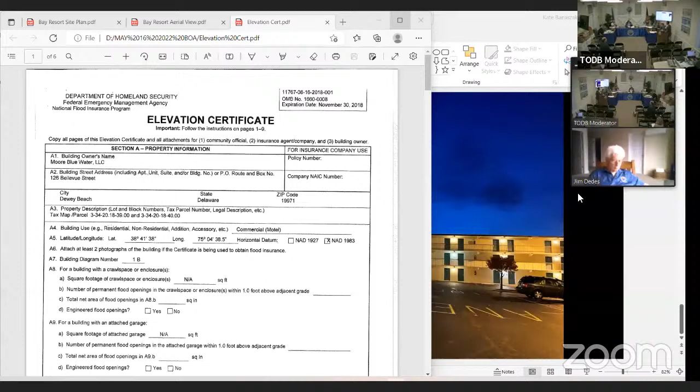Can we go then to the renderings? I'd like to show what we're trying to create with this project and what these variances we've requested will facilitate. Now let's go to it.

In the application, there's a bunch of renderings, the color renderings. Not that one. I think you showed me a PowerPoint that you had, or maybe not. It's the... here, there you go. So if you go to the meeting, it would be, if you go to, yep. So if you scroll down through that, keep going, and here they are.

So this is what we're trying to create at the Bay Resort. Some things you see in the front of the property here, there are some angled roof lines. Those roof lines do not exceed the height limitation, so we're not asking for variances in that respect, other than right in the main entrance area, we're proposing to change out the stairway to turn into an elevator to help with ADA and other guest experiences.

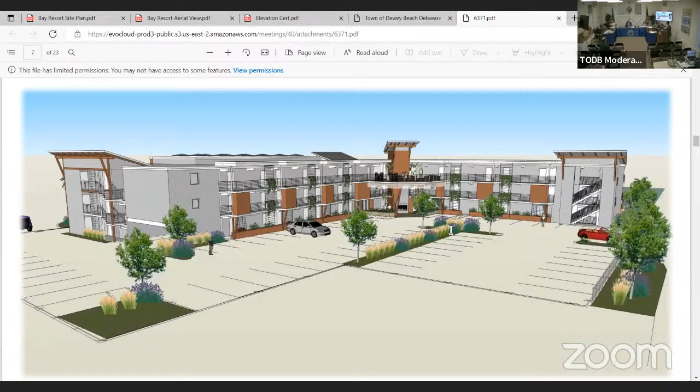And that angled roof or bulkhead above the elevator, there's a special exception allowance within the code, and we'll be asking for that tonight to be able to go 42 inches above the roof line.

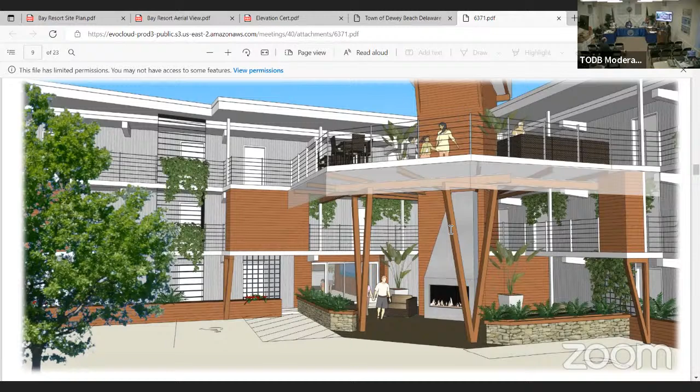Thank you. Here's just another shot of the main entrance. This one I thought was interesting to show you kind of the embellishments we're doing at the main entrance to the building itself. That top balcony doesn't exist right now. We don't need a variance or any special exceptions to create that, but I wanted to show you sort of what we're trying to create.

Next one. This is just inside the lobby. Next one, that's just a closer one. So here is that outdoor pool that would become an indoor pool if the variance for the enclosure is granted. Next one will show it, I think, a little bit better.

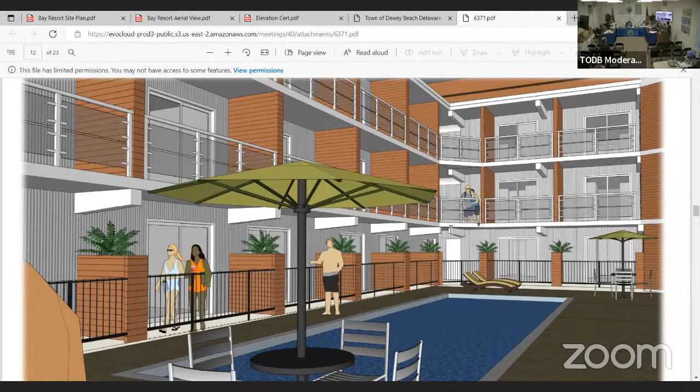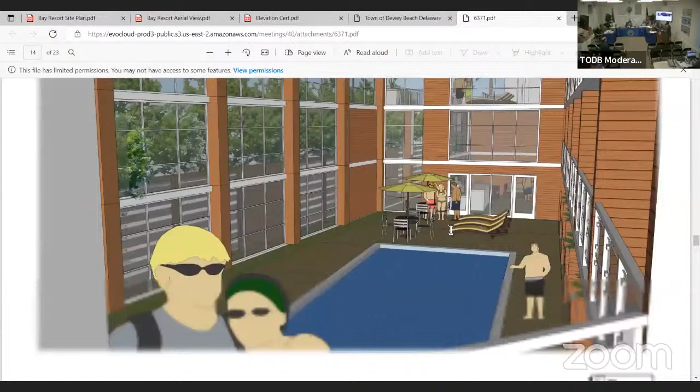One thing to look at on this photo is if you look beyond the windows at the rear of this view, there's some outdoor decking that is also part of this application. A very small portion of that decking is in this rear yard setback, and I'll show that to you a little bit later. Next one, there's another shot of the indoor pool, and if you look in the back, you can see that decking a little bit better now.

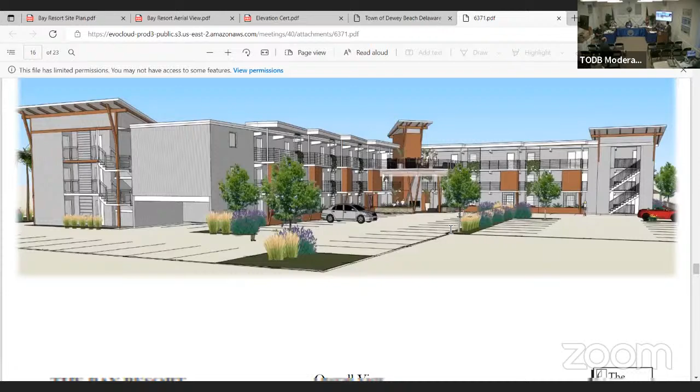Next, this is just sort of an aerial of that deck landing on the front of the property. Next, just an overall again of the front. Next one, here's the rear of the property, or actually it's a side yard technically, but it's the portion of the property that faces the bay.

The swimming pool there is a proposed new outdoor swimming pool that is subject to our application this evening, and I'll talk about why we may or may not need a variance for that swimming pool. Okay, can you go back up there? This one showed as well. So you can see the gazebo on the left-hand side - that's the relocated location of the gazebo.

Next one, this is just an aerial kind of showing everything. You can see maybe a little bit better view there of the pool enclosure on the right-hand side of the screen and the decking. Then you can see I talked about the row of cabanas at that first floor facing the bay. You can see the placement of the gazebo. You can see the placement of the swimming pool. Next.

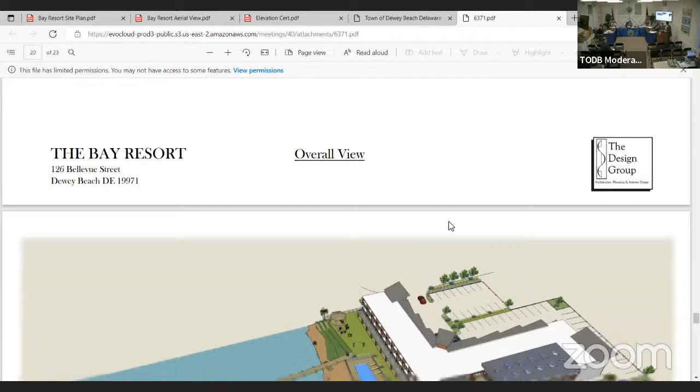Just a little bit closer shot. Next one. And that kind of shows the whole property as well. If you don't mind scrolling back, Kate, I'm going to leave one of them up. Let's just leave it on that one for now.

So that's kind of an overview of the property and what we're trying to create. I will say, anybody, please interrupt if you have questions as we're going. I'm going to go through each of the variances that we're requesting, one by one. But if you have questions, do not hesitate to stop me. I want to make sure what's important to you is more important to me than what I want to tell you. So any questions, let me know.

We'll go to public comment after the presentation, before the deliberation takes place. Yes, we're going to hear from the public.

So there is, of course, a legal standard that the Board of Adjustment will be applying as you review these variances. I will not bore you with it, I'll give you a condensed version because it was all in the written materials, I'm sure you've read all that. So the standard to be applied for these sorts of variances, these area variances, is the exceptional practical difficulty standard.

That standard was announced and discussed in the Board of Adjustment of New Castle versus Kwik-Check Realty case, the Delaware Supreme Court case. And the Supreme Court explained the exceptional practical difficulty test this way: such exceptional practical difficulty is present where the requested dimensional change is minimal and the harm to the applicant, if the variance is denied, will be greater than the probable effect on the neighboring properties if the variance is granted. So it's a little bit of a balancing test. What is the harm to the applicant if the variance is not granted versus the harm to the surrounding neighbors if the variance is granted?

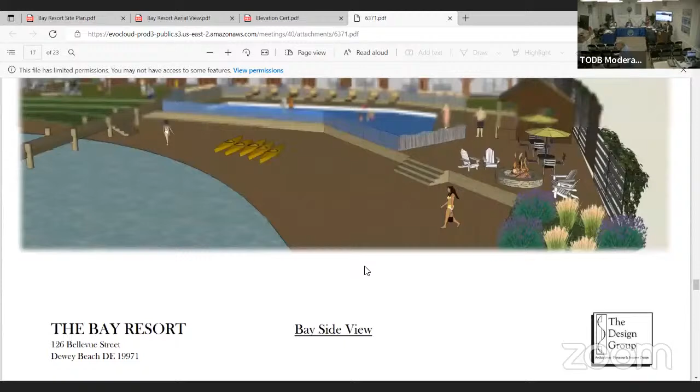How far is that? Each one is the width of the room, about 12 feet by about 5 feet deep. So each of these so-called cabanas extends out 5 feet, taking the porch from a 5-foot by 11-foot porch to a 10-foot by 11-foot porch, for just those ground floor units.

So the 12th unit, the one furthest on the left—yes, the encroachment into the setback is going to be about 6 feet, and it's going to be 5 feet wide, right. It's not extending any farther into the setback than the edge of the existing building.

And is it a solid wall on that end? No, all of those are just 4 posts with a trellis—more or less like a pergola, I guess you might call it. So it's not a solid wall extending off the existing building into the front yard setback, it's just open. There's a little bit of lattice screen rendered in the renderings here, but in this case it probably would be open—the lattice screen is intended to provide privacy between porches, so it wouldn't need to be there on that end.

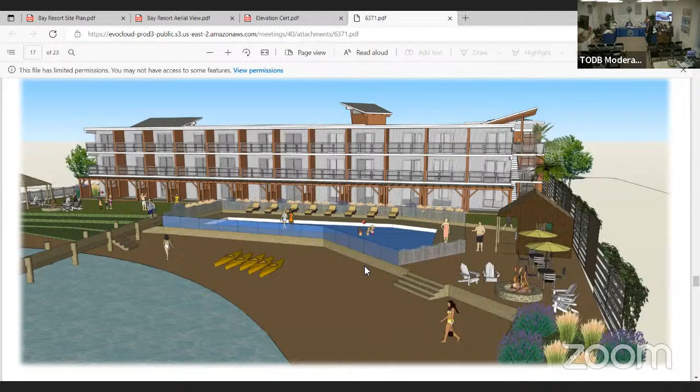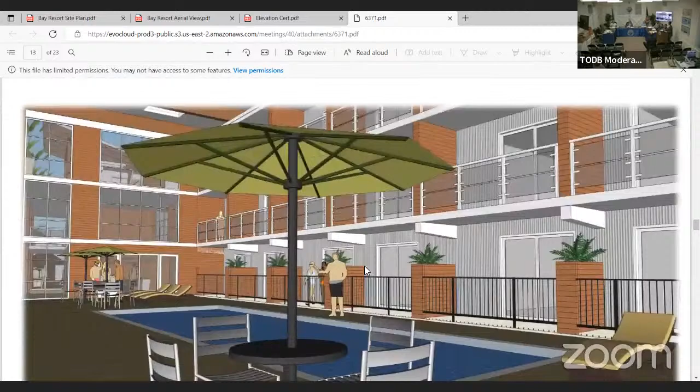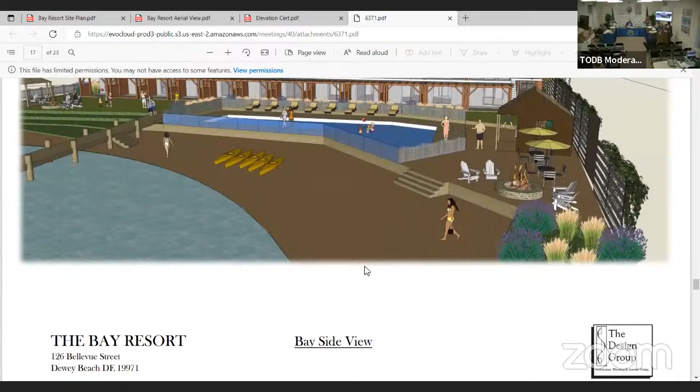Got it. So this is the first floor—you rent the first floor and they have the cabana. Correct, that's right. Do we have a better picture of that? So there's like a gray area, which is the ceiling or the roof of the cabana.

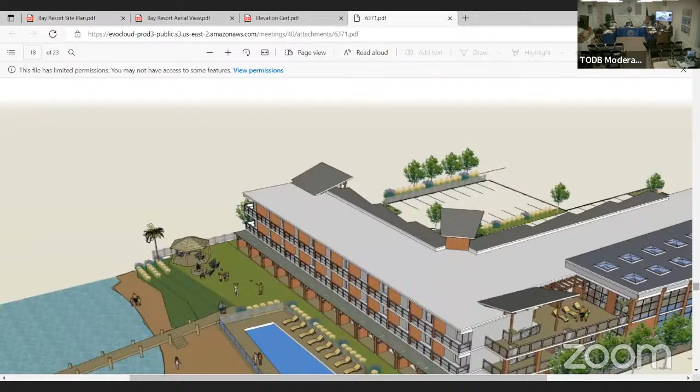Any other questions on that single cabana? David, any questions? Just looking at it. So basically what you're saying is there are 12 rooms along that row. Correct, but the variance only applies to the 12th room, because everything else is within the setback already.

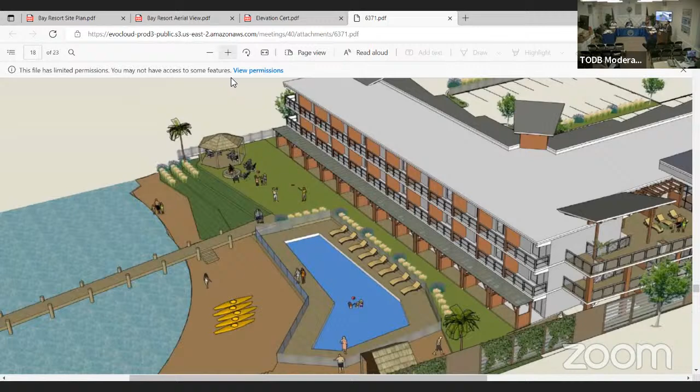Okay, so I'd like to move on now to a variance we've requested for relief from the freeboard requirement. This one gets a little technical, so I'm sure we'll have some discussion on it. In addition to zoning code variances, this board is authorized to grant variances from the town's flood damage reduction code. The existing hotel is in an AE flood zone.

FEMA has said the base flood elevation in an AE flood zone is 6 feet, so FEMA says elevate your structures 6 feet if you're in an AE flood zone. The town has added an additional 12 inches of what's called freeboard, so elevate to 7 feet.

Our existing elevation is at 6.4 feet, and I've submitted the flood elevation certificate. If you'd like to see it, we can look at it here, but it's at 6.4 feet. That was a 2018 certification. So we are about 4.5 inches above the FEMA required base flood elevation.

We are about 7.5 inches below the town's freeboard requirement. So if that makes sense, we're above what FEMA says you have to be at. The town has said let's do a little bit better, get 12 additional inches up. So we're in between those two — above FEMA by 4.5 inches, below freeboard by 7.5 inches.

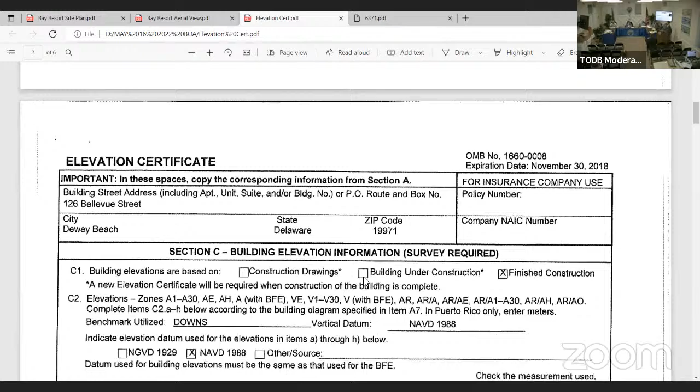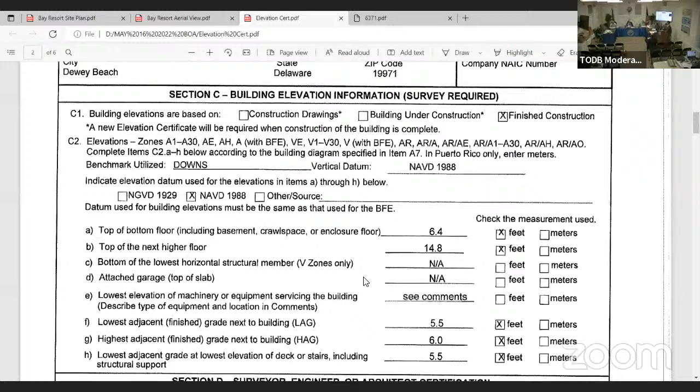So what we're asking for is relief from the 7.5 inches of freeboard. I guess you could say we have about 4.5 inches of freeboard, and we would need 7.5 more.

Why do you need that? Well, so, I mean...

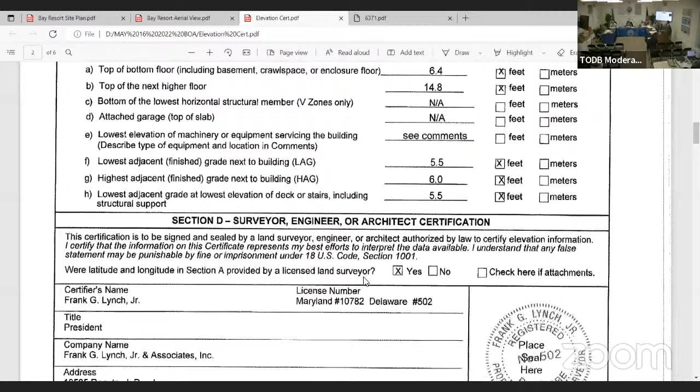You're not constructing, you're not demolishing the structure. Where do you only need it in portions of the development, or do you need it— so what kicks in is there's a requirement within the code that if additions and renovations are valued at greater than 50% of the value of the existing structure, then you have to come into compliance with all of the town's flood damage reduction code.

So if these variances were instead granted, we wouldn't. We're not sure, to be honest with you, whether we're going to exceed that 50% threshold or not. I think we'll be at least in that zone, but we're hoping to avoid it by explaining why requiring us to have that additional freeboard doesn't really make a lot of sense in this instance.

And the reason it doesn't, in my view, is first, nothing is changing about the elevation of the building. So what's been there for the past 40 years would remain. And again, I don't think leaving it the way it is works a detriment to the neighbors who have lived with it the way it is for the past 40 years.

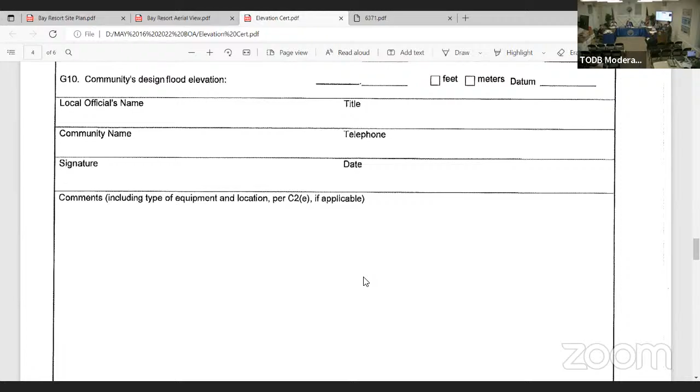So I don't think there's an argument that if we don't raise it, or if we don't do something else to comply with the flood damage reduction code, that it will somehow work a detriment to the neighbors.

Secondly, I think we'd be having a much different discussion if this structure was below the FEMA requirement. When you're below the FEMA requirement, then I think there's a real conversation to be had about: you sit in this AE zone, should we move forward and get you above it?

FEMA has said 6 is good enough. The town has said we'd like a little bit more. And that's why I'm saying it's a different conversation if you're below the FEMA standard.

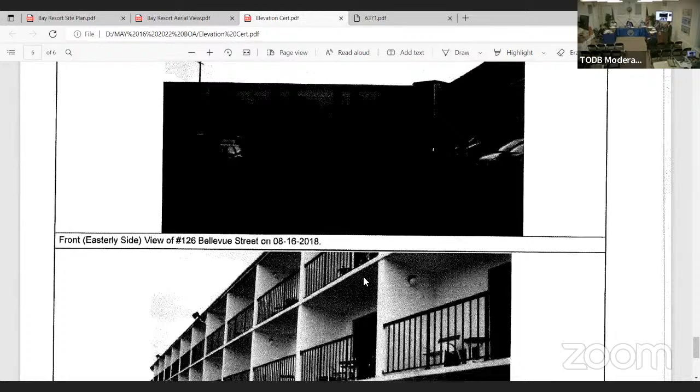If you're below the FEMA base elevation, I think you would have concerns about what does this do to our flood insurance rating, because every year the town is audited as to what the flood insurance rating is.

And if this variance is granted, it certainly will be something they look at when considering ratings for the town. But I can tell you, in the times I've done this, I've never seen a variance from a floodplain regulation that exceeds the FEMA regulation work any kind of detriment to the flood insurance rates. So I think that's why this one's a little bit unique.

We're already above the base flood elevation that FEMA has set out, but we're not as good as the town wants everybody to be, so we're below it. There are a series of considerations—

The cabanas and the pool enclosure? Well, the cabanas actually, I guess, will be at base flood elevation because they're on the first floor. So they will be at 6.4 elevation — nothing we're constructing goes below 6.4.

I mean, the pool, of course, is below it, but the pool isn't a structure that's considered for these purposes. So there's nothing new that's going to go any lower than where the building currently exists. Maybe I'm not understanding the question — take a shot at it.

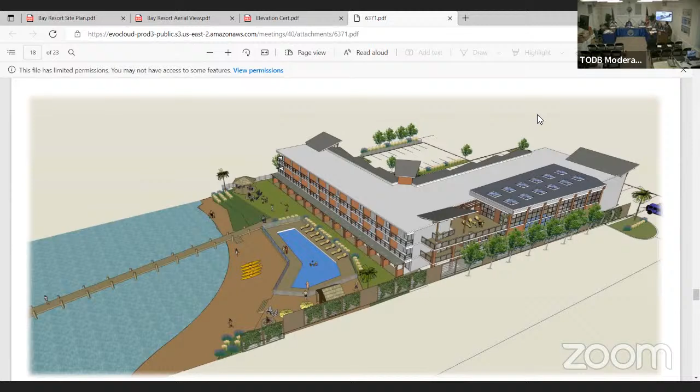So I guess the area is adjacent. Am I correct that that's referred to as Sunset Park? Not at that end. That land that abuts it—maybe, Kate, are you able to go to the aerial again? So that land there, if you see where the gazebo is identified, is relatively close to the bay. It's not developed right now. I don't know if it's developable or not.

The gazebo placement is still quite a distance from any residential structure, so I don't think so. Again, the code provides that if it will not substantially affect adversely the uses of adjacent and neighboring property, then the special exception should be granted. This I submit does not in any way adversely affect adjacent property by moving that gazebo to that area.

How far away is it from the pool? From the pool, the gazebo, where it's proposed? Yeah, it's on the other side of the property.

It's just aesthetic—are you building a brand new one, or are you taking the old one and moving it? This would be brand new. I would love to move it if it's facing... same size and shape, but the idea is to frame it to keep it from looking odd from the roads.